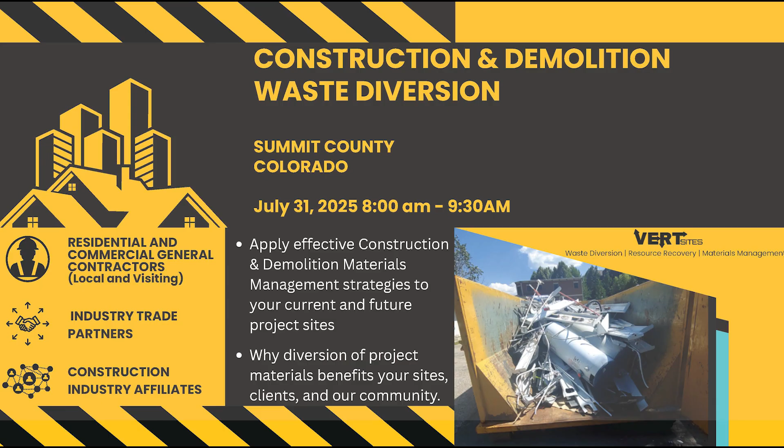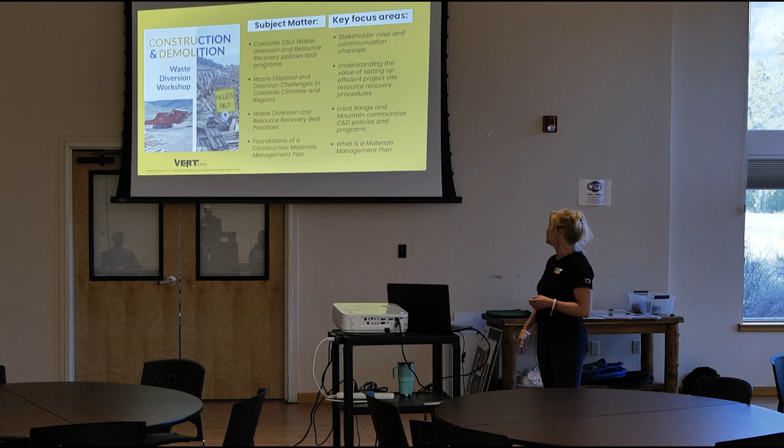So this is not a linear presentation. However, you are going to walk away with a bunch of knowledge of C&D waste diversion policies and programs throughout Colorado, disposal and diversion challenges - some of you experience these at your job sites - best practices, learning about construction materials management planning, understanding the value of setting up efficient project site resource recovery procedures, and stakeholder roles and communication.

So I'm going to pick on a hauler over here. They're a stakeholder in the C&D disposal process - general contractors, the scrap.

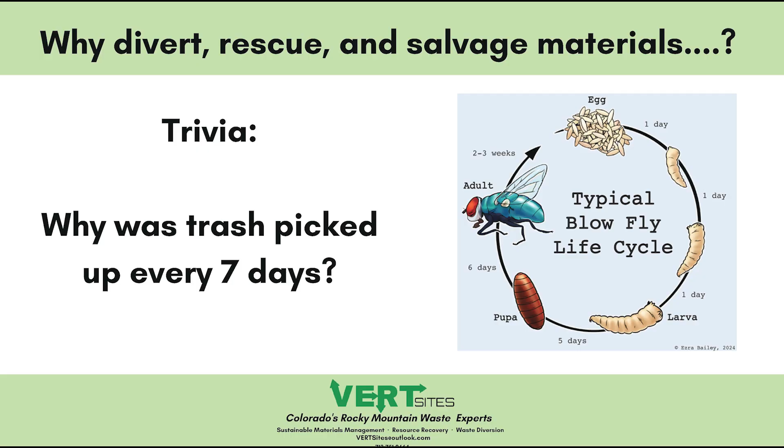So what is waste diversion? Waste diversion actively minimizes solid waste generation and solid waste materials sent to landfills by employing source reduction, resource recovery, reuse, composting, and other material recovery systems. So it's not just recycling, it's a bunch of other variations.

How many general contractors are in here? Residential general contractors, renovations? So do you try to repurpose them, reuse them before you send them to the landfill? Yeah, so we try to do waste diversion, not just recycling things, but donations as well. So waste diversion is kind of all-encompassing.

Why do we do waste diversion? So 4 reasons from the EPA. We conserve valuable landfill space, and I will introduce this back table - there is a slide for them, but briefly, this is our Summit County Resource Allocation Park crew. Aaron is the solid waste director, so give me a few slides, I'll bring them in.

Thanks, Aaron. It reduces greenhouse gas generation. In 2023, the waste reduction model estimated Colorado prevented almost 2 million metric tons of carbon dioxide from being generated. It reduces energy consumption, and it typically creates stronger economic impacts than just regular disposal, meaning it does create green jobs.

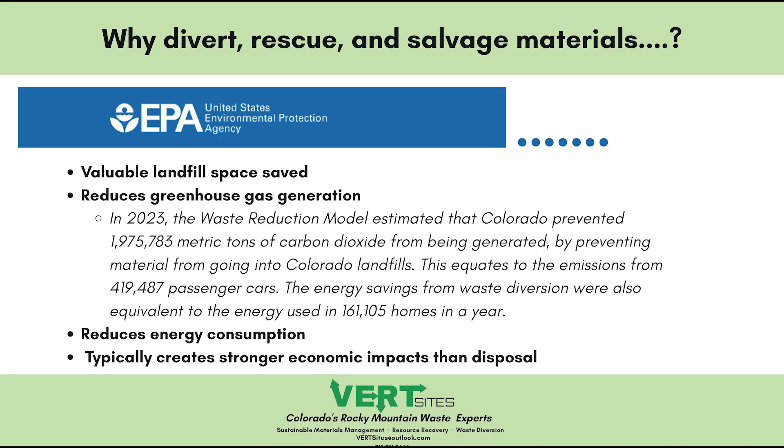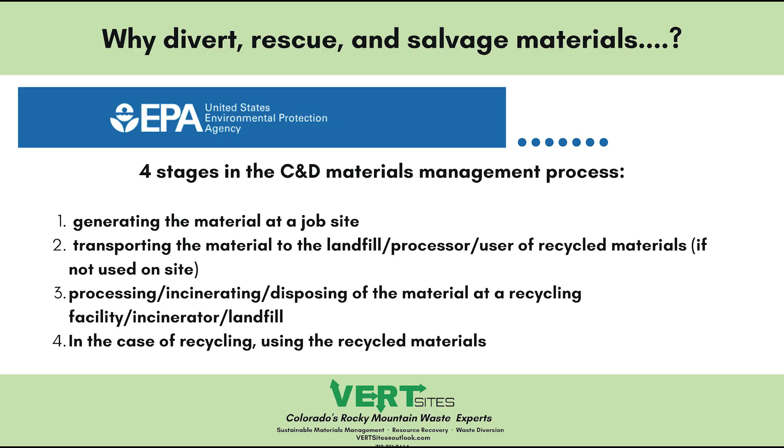So for us, the 4 stages in the materials management process, we're going to really focus on the first 3: generating the material at the job site, transporting the material to the landfill or processor or user of recycled materials, processing, incinerating, disposing of the material at a recycling facility, and then in the case of recycling, using the recycled materials. Do we have any questions so far?

No? All right. So before I continue, I actually wanted to get an idea - how many general contractors? Cool. And then waste haulers. Awesome. Government officials. Awesome. Who else? Who else? Anyone just here for fun? Trade partner, Aaron.

What? Cool, I did not know that.

All right, so exploring the stages. Material generation - these are your typical materials at a construction site, your top 10, right?

So pallets, why do you guys get pallets? Deliveries, right? Cardboard, why do you get cardboard? Packaging, deliveries, packaging. Brick, right? Scrap metal, mostly probably in HVAC at new construction sites, right? Asphalt, just your typical landfill stuff - plastic packaging film, asphalt, dirt, scrap metal, lumber, things like that. Those are kind of your top materials that you might see.

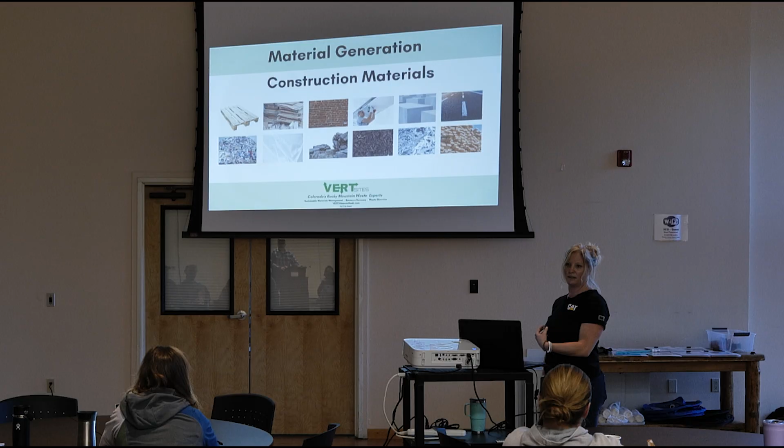Is anything missing? General contractors, are we missing any kind of materials for new construction? We feel good? All right.

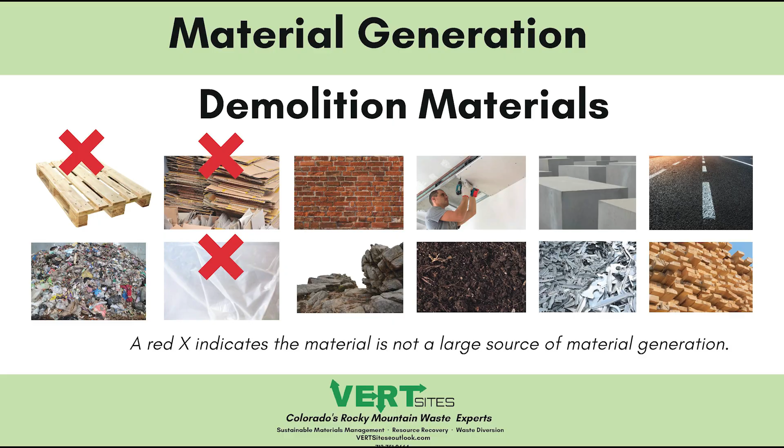Demolition - you might get cardboard and packaging, but it might already be on the site, right? It's not going to be generated unless you're bringing something in. But demolition, you're typically going to have your landfill. You have this awesome pointer, because I couldn't find the laser pointer. We have our landfill, right? You're going to have maybe some brick masonry, maybe scrap metal, maybe different kinds of scrap metal, cement, asphalt, lumber, treated lumber, things like that.

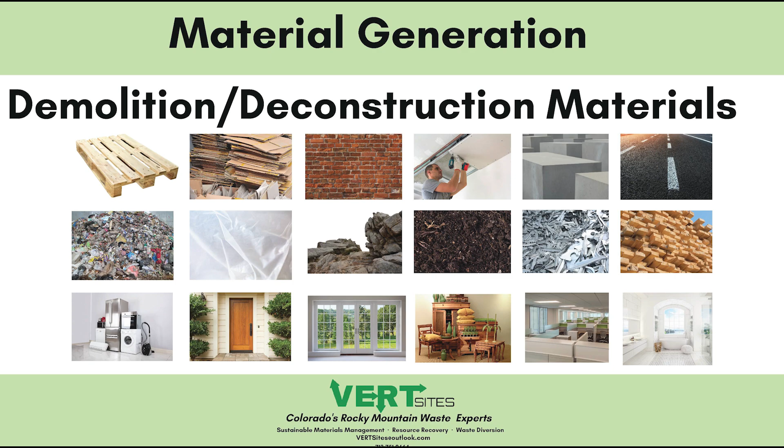And then for demolition, deconstruction, or essentially selective demolition - deconstruction is demolition, it's just selective. It's unbuilding a building, essentially. And when you're doing that, it sounds like renovations, we might have that. You come across all sorts of materials, it might depend on what you're doing. It depends on if the whole building is coming down, right? So you could have everything on the bottom, you could have everything depending on what you're trying to do with the job site.

So let's play a little game really quick. What dumpster do you think that is? New construction, renovation, remodel, demolition, new construction? Why do you think new construction? Yes, usually if there's a lot of drywall at new construction, which is usually clean material, that is a telltale sign it is a new construction site. If you have dirty drywall, it's either demolition or maybe a renovation.

What about this one? Demolition, renovation, new construction? Renovation? Actually, this was demolition turned into new construction. What about this one?

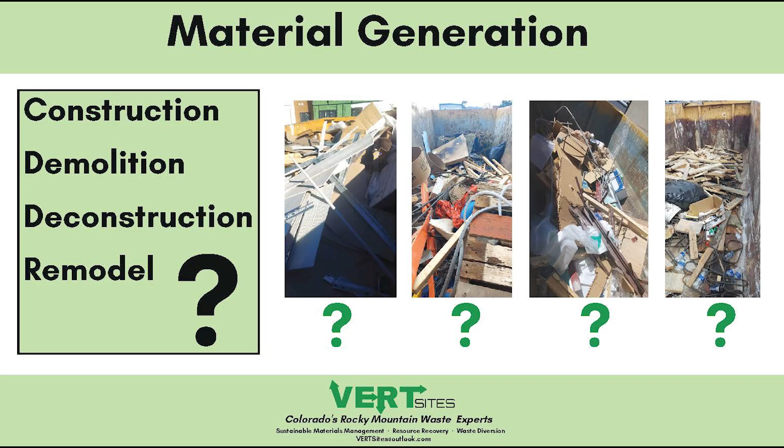That one? New construction from this same site, just about 6 weeks taken apart. Demolition ended, and then it turned into new construction, right? And then the one on the right is just a different kind of angle.

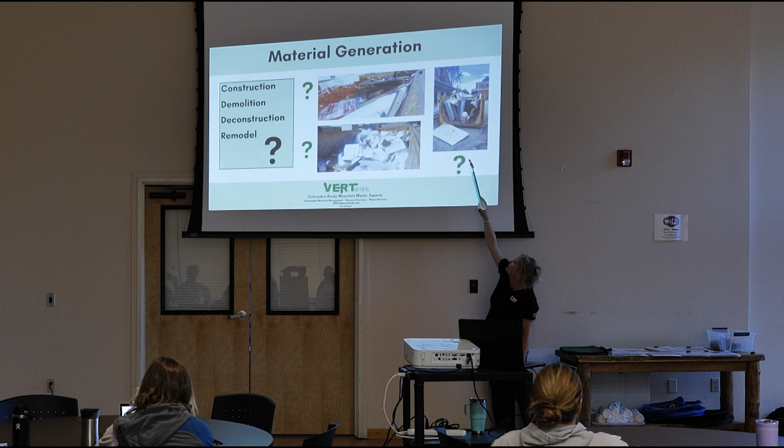What about this one? It's hard to see. Well, this is a lot of packaging. It's probably new construction. Up top, new construction. This one, right, there's a toilet, there's mattresses, there's a bunch of things in there.

Demo, yes, definitely a demo. We recycled the mattresses that could have been recycled, the clean ones. The scrap went out of one of those. It's all right. Your materials look different depending on what you're actually doing at the site.

Also, hazardous waste generation, right? So e-waste, there's not e-waste police in Colorado, but in the state of Colorado, it's illegal to throw away e-waste. Ballast can't go in the landfill. So in demo, renovations, maybe even new construction, you're gonna have hazardous waste. One of the best things you can do is actually just kind of set up a section, wherever, an area for collection. Do we have questions on material generation?

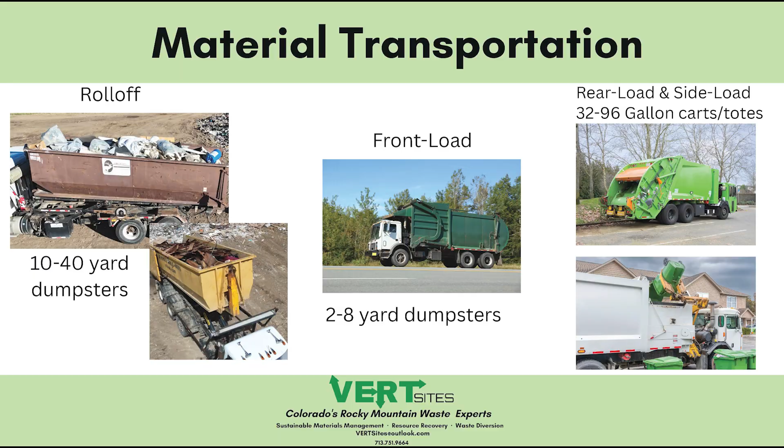Your roll-offs are your typical construction ones. However, you might have front load dumpsters and see a front load truck at your site. All of these trucks are very different from each other, and that actually matters depending on the space at your job site, depending on the weather, depending on how many people are at your site. So real quickly, residential, if you have trash or recycle pickup at your home, this is the truck you're gonna see. You'll probably see most of this at commercial businesses. I think most of us are familiar with this at job sites though.

All right, so getting into some other ways, right? How many of you self-haul your materials to the scrap? Any self-haulers, right? What do you self-haul it in? Truck, trailer? Both? So we don't just have commercial haulers, we have self-haulers as well, just different variations. Dump truck, 60-yard side loads, different ways for trucks, right?

Getting into material disposal, so just disposal containers, right? So we talked about, these are our final destination containers essentially, right? So these are 96, 32, 64-gallon totes. And when I mean final destination, maybe you have a kitchen garbage can, right? That's a collection container in your kitchen. You take that out to a disposal container for final service with the truck.

So these are just residential. You can see these at job sites. Sometimes these make sense at your job sites to use depending on what you're trying to do. We get into our front load containers, 2 to 8 yards. Again, depending on your materials, it might make sense to use one of these if you're going to try to divert some things. We do have some plastic ones in Summit County, just because there's bears, a lot of haulers might not be using these for landfill purposes. It could be used for maybe some recycle purposes, but these are your front load dumpsters.

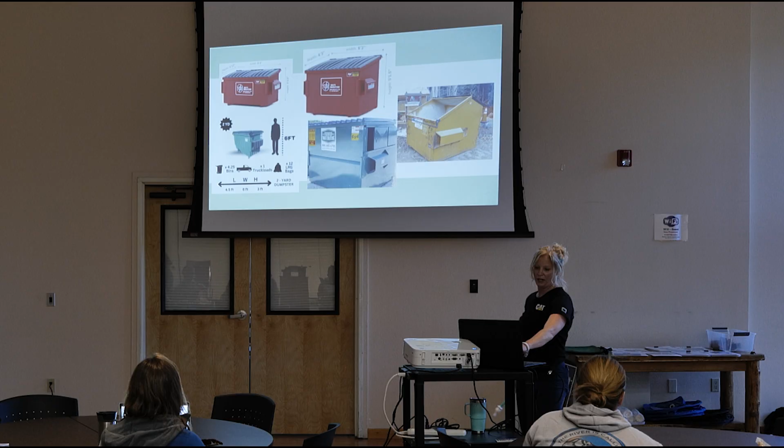You can be used for trash, but we recently used one for just paper and cardboard recycling, right? A dumpster is a dumpster, it doesn't make it trash or recycling. So here it is, right? So when we were assessing some things, we're like, we can't do a lot, but we can recover a lot of paper and cardboard. And so we used a front load, right? Because a roll-off, it was unnecessary, it was going to cost too much money. We didn't need 20 yards. It was about 16 to 18 yards, and it was just 2 trips. So we saved the roll-off space and didn't have to trash it.

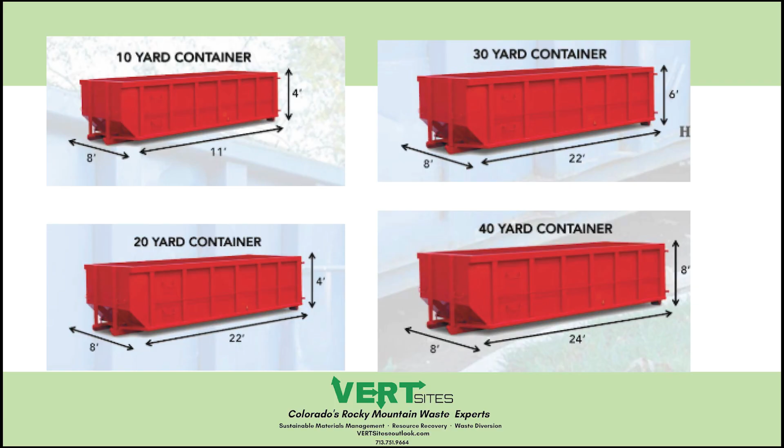Questions on trucks and disposal containers and collection containers? I have 120 slides, so I'm sorry if it seems as if I'm going fast.

Yes, Erin. This is where planning comes ahead, right? Because Summit County, we all know the busy season is right now. This is when everybody wants a dumpster, multiple dumpsters, multiple containers. I don't even know if your haulers have containers right now. Some might be out and you're on a wait list reusing things. So we do run into some issues if you're trying to do some waste diversion, but there's no equipment available.

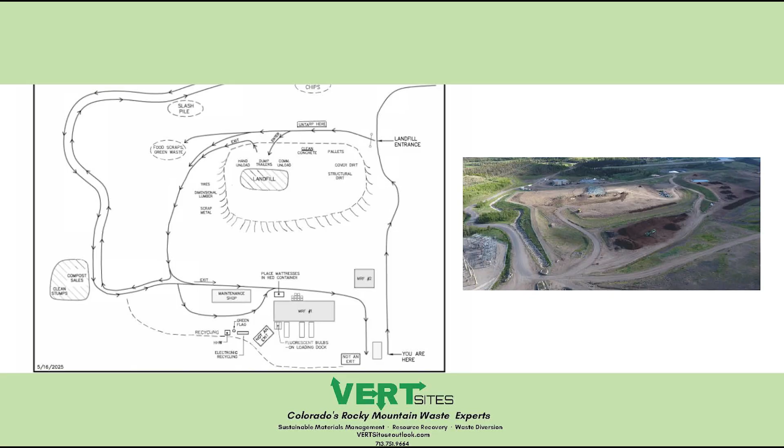You can take a QR code, it's gonna take you to the website of this page. Some of this might need to be updated for some pricing, but this is the most recent pricing. So the QR code is gonna take you right there if you're wondering what does it cost, what does the scrap take. This is just the landfill. Again, if you're not familiar with it, this is our landfill.

Here's it in action, if you've never seen it. We're not going to watch it all, but it's pretty cool. They've got some cool equipment.

So material streams, I'll call on the scrap if anything is wrong, but this is kind of what we can do in Summit County when it comes to what you can do at your job site. C&D trash and landfill has recently increased to $85 a ton. I believe it's going to increase next year, correct? That's correct, to $150. Did you hear that? $150 a ton in 2026.

That is a big, significant difference. It went from, was it 79 before to 85? 72. Okay, 72 to 85, that's still kind of a jump, right? But we're going from that to 150. That's significant. This is where we can come in and try to plan for some things.

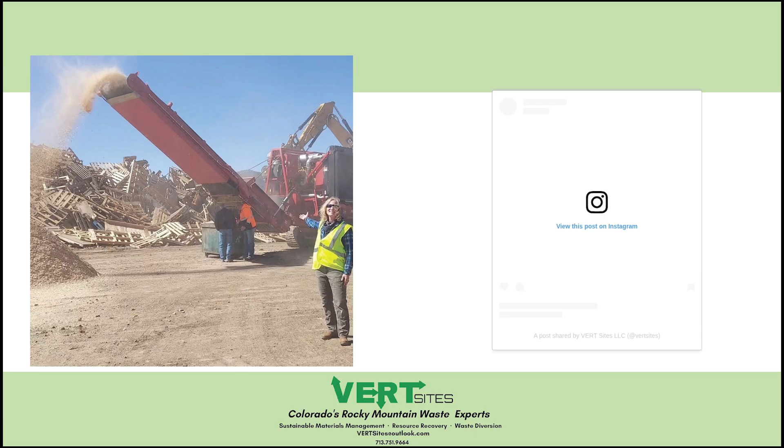So what's new at the scrap? There's something new and exciting - it's a grinder, right? The big pallet pile we all saw, this is what this equipment is for. This is what it does, and I will let the scrap actually talk about it.

So this has been in the works for 1.5, maybe 2 years, Aaron, right? So it takes pallets, it takes slash, it takes raw dimensional lumber, which there's a lot of, and it grinds it into - take it over. So for this program, it is raw dimensional lumber only, clean, not treated.

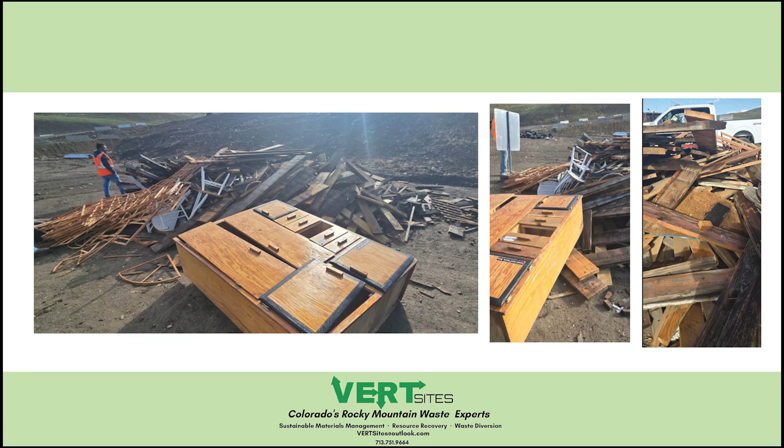Let's explore this pile a little bit, right? My general contractors probably know the answer - is this raw dimensional lumber? Is this what we need at the scrap? We need GCs - in order to do this, we need clean material. And so this is not the wood pile, this is actually just trash.

We need raw dimensional lumber, not treated - I mean, I think most of this honestly could be trash. But this is to give you an idea. I know it can be challenging at job sites to do some things, but it's challenging at the scrap to recover things if this is kind of what they keep getting. So give them clean materials.

It is cheaper to do raw dimensional lumber. It is cheaper to separate some things. You have to plan for it though, and again, we're gonna get into that.

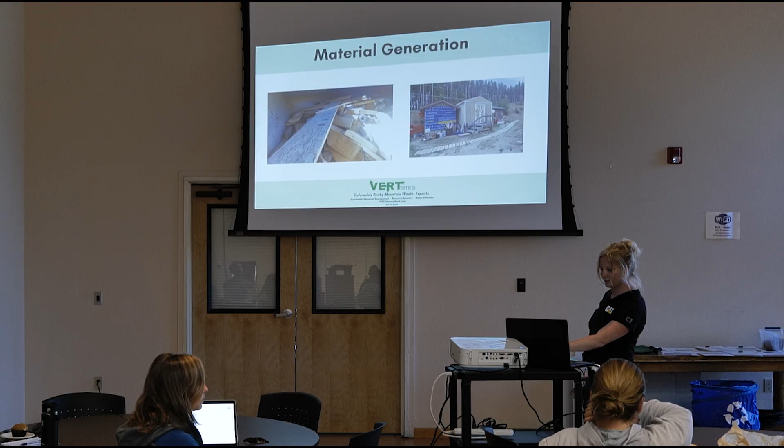So it can't be scrap lumber that's got nails in it? It can now - oh, it can. Yeah, because the grinder takes it out. We have that magnet. So dimensional lumber with nails in it - yeah, so new construction site cutoffs, throw it in, that's totally fine.

So this is an example of - please don't send this material to a recycling pile, send it to the landfill, just a little bit above there. This is just in a dumpster, a combination. So raw dimensional lumber or no? No, right, trash. Raw dimensional lumber? Yes. Cool, awesome, we can throw that in the program.

So if you're gonna do this, just try to be mindful of it and work with your trades, work with your staff, especially if you think you're gonna have a lot. New construction sites, especially multifamily, can produce a lot - I had one that had 90,000 pounds. That's significant compared to recycling versus landfilling it.

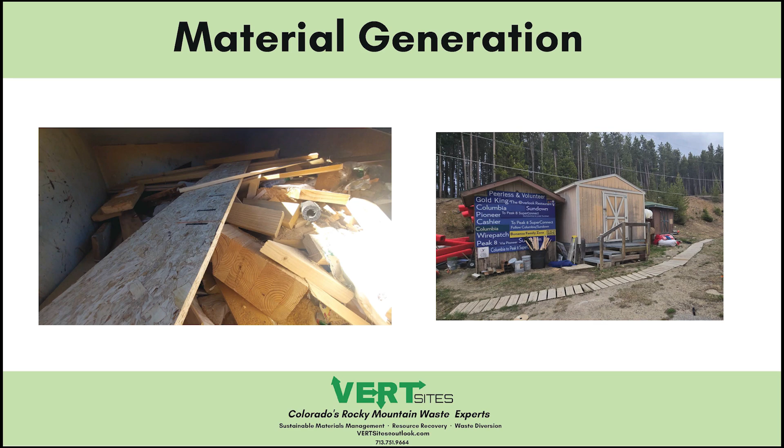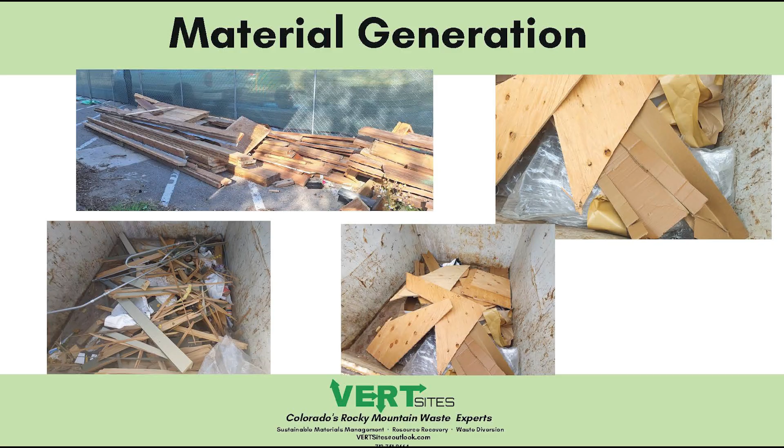Here's an example of some other job sites, clean things, right? So raw dimensional lumber, I don't need to get too much into it. So, right, here's clean stuff. I know there is OSB right there, but my scrap guys, is this a clean dumpster for your standards if there's maybe 1 or 2 sheets of plywood like that? Yeah, we want it clean, absolutely. This also shows you it is possible to have clean streams at your job sites and to separate things from the trash.

I think this is the last one. So just regular, right? This is just a combination of some things. You have some cardboard pallet, like the pallet pile from the landfill is probably like 25 feet to the east of it, I think, I don't know. It's not that far, is what I'm getting at, right? So it could have gone over there. You have some cardboard, right?

Just some things to keep in mind from your own job sites if you're going to produce some of these. This is where your different container sizes come into play. This is where estimating your materials also comes into play.

Yeah, great question, thanks for bringing it up. Space is an issue, and it's not just that, right? In Summit County, we have snow problems. You lose 30% of your job site just right then and there. I'm going to talk about some space challenges. That is one of the biggest issues we do have, not just here in Summit County, but most construction sites in general. So if you don't mind, can we hold off? Hopefully I'm going to answer it in like 20 minutes or so and get to that slide.

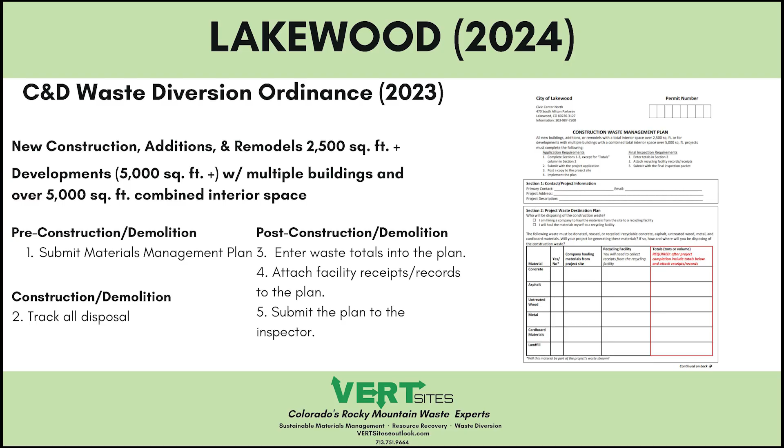Typically, these policies are tied to your permit - by getting a permit for new construction or demolition, or tied to certificate of occupancy. So in order to get your certificate of occupancy, you might have to hand over a materials management report or a waste diversion report.

Pitkin County, they have an interesting one. One, they use Green Halo systems to track everything. But for new construction, pre-construction, demolition, you have to do a compliance deposit, meaning you estimate what you're going to generate, whatever that's based off of. It's $1,000 per estimated ton. You hand that over, so if you think it's going to be, I don't know, 40,000 tons, you can do the math and you give that over. In order to get that deposit back, you have to do some waste diversion.

They have 10 different streams though. They do have some different outlets to where it is way more available to do some things over at Pitkin County. Aspen pretty much just copied Pitkin County. So if you're wondering what Aspen passed, it's exactly what this looks like.

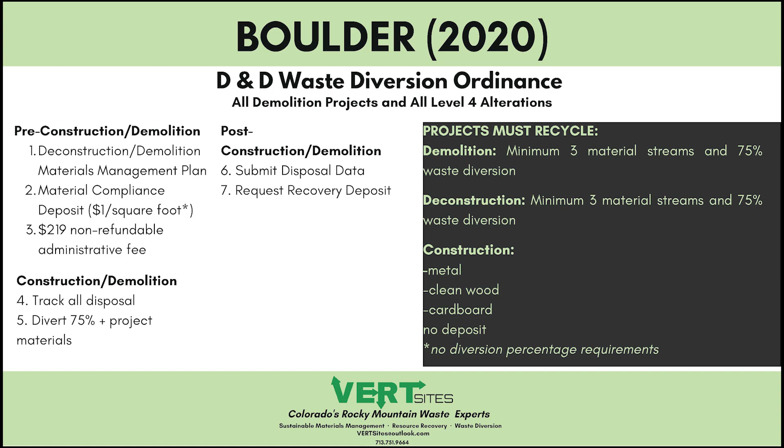75% seems like a lot, but when we're talking about demolition, what is probably one of your biggest, heaviest material streams? Drywall? Concrete, yeah, of course. Drywall is absolutely heavy too, that's why it'd be awesome if we could divert it from new construction sites as well. So this is mostly demolition focused in Boulder.

Denver has the Waste No More ordinance. You have to compost, you have to do certain things down in Denver. This ordinance requires all construction and demolition projects to separate and recycle at minimum readily recyclable concrete, asphalt, clean wood, scrap metal, and corrugated cardboard. We can also do that in Summit County now too. But these are ordinances, so that's what some communities have in place.

Again, Summit County is not alone. Why is Summit County talking about it? We did a waste diversion study - when I say we, Summit County did, I wasn't part of it. It was the 2018 general waste composition study at the scrap. 30% of landfill materials in Summit County is C&D debris.

Colorado is 35%. Another stream Summit County had was organics, that was also 30%, and Summit County has been working really hard on organics. So now we're moving to the C&D stream. This is a really big challenge, right? What are they doing about it?

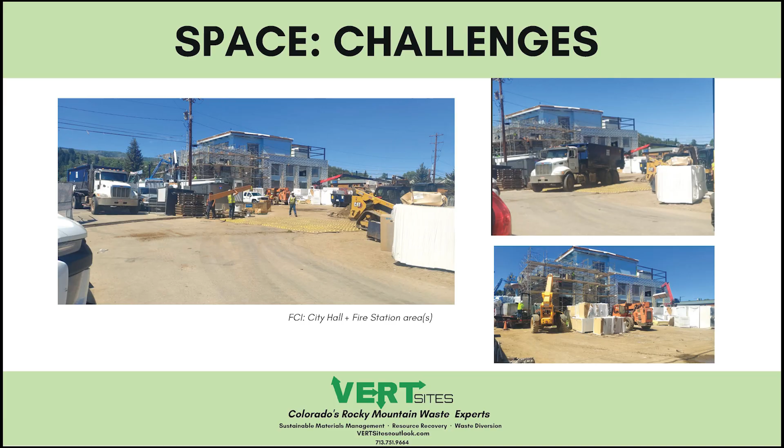They have an HOA. Guess what? That HOA doesn't want your dumpster or your portable toilet on the street, right? There we get into space issues already. And you can only have one dumpster. That really poses a problem if you're trying to do waste diversion. This might be all you can actually do, based off of the HOA or even town regulations.

So you have space for only one dumpster? Yeah, it makes sense - it's a trash dumpster, and that is out of your control unless you can talk to the HOA or the town to figure that out. The regulator really can't do much about that if it says you're only allowed one dumpster or one toilet, right? So whenever you have to go in and talk to the HOAs...

So the DoubleTree, when they were going through one, guess what - Town of Breckenridge has the same thing. You can't have a dumpster on whatever road the DoubleTree is on. It couldn't be there. I don't know the road, forgot. So that's a Town of Breckenridge regulation, not an HOA. That's like going against their own thing of wanting to do some waste diversion.

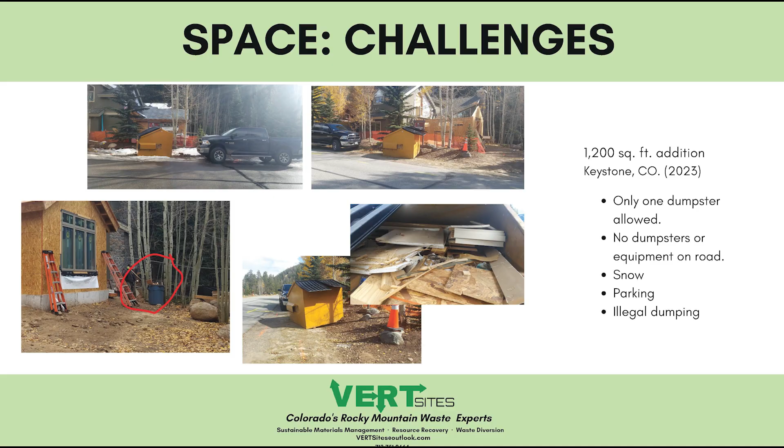So you're only allowed one dumpster, no dumpsters or equipment on the road. There's snow, material storage, and parking, right? You have equipment and you have materials - that matters besides doing waste diversion, because your roll-off has a delivery fee, you have a hauling fee, and then even if you get a 2 to 8 yard dumpster, you're still going to have a delivery fee for that.

And the disposal fee, depending on the contents - if it's a cardboard front load delivery, it should be free, it should be. I'm not a hauler though, but...

This is where estimation comes into place, and this is where Strong Future can actually help out, because when you figure out the planning process, you apply it to other job sites. Getting started is the hard part, but keeping up with it - that's why I say take advantage of Strong Future, please take advantage of it. Because it does cost more - Summit County knows it costs more, that's why the funding is actually available. They're trying to help increase this.

So this is over in Keystone, right? Only allowed one dumpster. This contractor specifically likes to use 8 yard dumpsters. He does not use roll-offs, he likes dumpsters for whatever reason. But again, only one dumpster allowed. No dumpsters or equipment on the road, snow, parking, and illegal dumping. This is a prime dumpster to throw your own garbage in, right? If you have something big at your house, illegal dumping happens.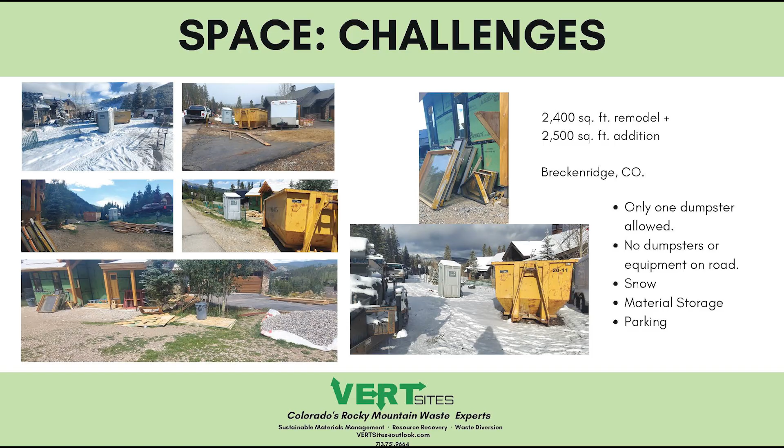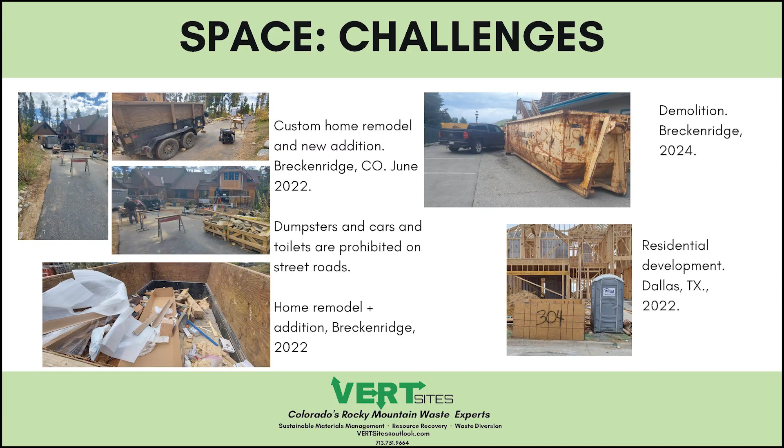Again, some more space challenges. Can't have a dumpster on the street. This is Highlands, guess what? They need all this. It's a long driveway, thank God, right? Because there's a bunch of materials in this driveway to do this home remodel. But you can't have a dumpster on the driveway. You can't have a toilet. You can't have a portable toilet on the driveway or on the roadway. So again, the challenges that pose for waste diversion, right? It's cost of things, it's regulation of things, if you can't do some things, but maybe you could have 2 of these trailers, right? This is where you have to get creative and know your materials, essentially.

This is in Dallas, right? Again, they actually had 2 toters in here. This is a neighborhood development. They had 2 toters in here for materials, and they built these around each house. So they got toters from haulers, and I don't know the contents, but recycling was one and trash was the other, essentially. And it was kind of spaced out.

So some opportunities: know your parking areas, they're probably going to change when winter comes, right? Know your snow storage areas. Be aware of your trades on site. Just like Jim mentioned, you're in different phases at different times. You're going to have framers on site, electricians on site. You might have 10 to 12 different trades on site, essentially. That could be 80 people, that could be maybe 60 cars. That's a large job site right there, you know?

Be wary of that. Learn HOA and county and city road regulations. Sometimes things are just out of your control, like if you can only have one dumpster, that's it, right? Inquire about different types and size containers. Call your haulers, let them know what you're generating. Let them know it's a new construction site. Let them know it's a demolition site. Let them know that you think you might have a lot of scrap metal. Work with them - I promise you that 2 to 8 yard dumpsters are cheaper than getting a roll-off sent there. I don't know how much cheaper, but this is where you have to do the estimation or work with someone who can do that.

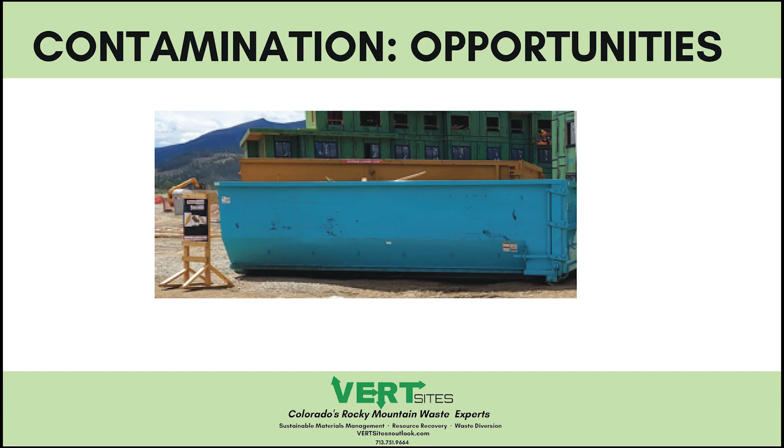So yellow for trash, there's no sign. This sign probably took 10 minutes to make, essentially. But one of the biggest things, if you're trying to do waste diversion at a job site, you have to have signage. Don't assume your trades or anybody knows what goes in a dumpster, because most of us see a dumpster, we assume trash. I have seen it happen where it's a recycling dumpster and someone just throws trash in there because a dumpster is a dumpster to most people.

So one way you can do it, if you can, get different color dumpsters and get some signage. You can share this with some of your team. So whenever we just want to do office paper, right? If we're doing a single stream sort of thing, you could do cardboard, office paper, aluminum cans, bottles, things like that. Hand that out to your trade staff, things like that.

So this site, we didn't do signage. Kind of took a chance on that, but it would have benefited from signage. So this is, again, nothing but cardboard, paper, and that's all this dumpster was for. It was just recycling. But we did have signage if it was available.

It's actually a closed site. The contractor felt pretty good. They didn't want or need the signage.

So this is an example of it would have cost a lot more money if you had a roll-off on site versus getting that commercial compact truck, because that commercial compact truck is already in Breckenridge doing single stream recycling on a day. They just come in, stab and grab, and they don't have to go to the scrap with that material. I don't know how much it would cost to do that, but that's kind of an example.

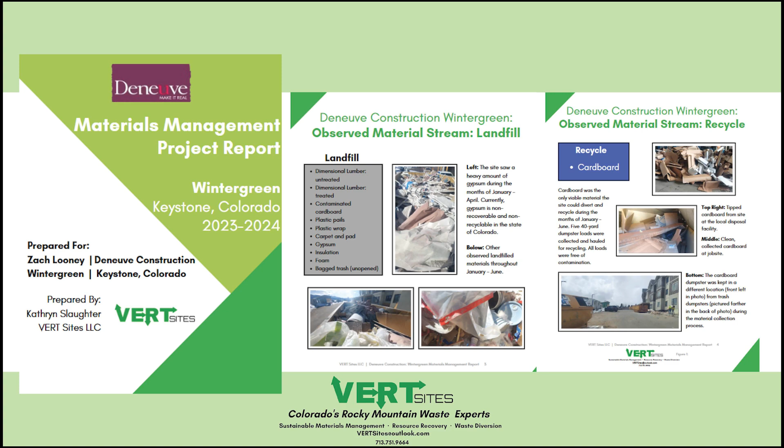We observed landfill materials, and then all we could do was just cardboard. That's all. And this is where we did the 5 roll-offs of cardboard from 4,000 pounds of it. Our signage, they got lucky with a gable top, so this is great for cardboard if you're worried about illegal dumping.

We had something in place for it though, so that's like an option. You're just like, I want to do this. And again, if you have a truck, you can haul it yourself to one of the drop sites, obviously the scrap, so that is an option for cardboard. It's easier to break down and kind of just keep in a corner, create some guidelines. This is all broken down cardboard. And then if you get a gable top, you get a couple of extra yards to throw some materials in.